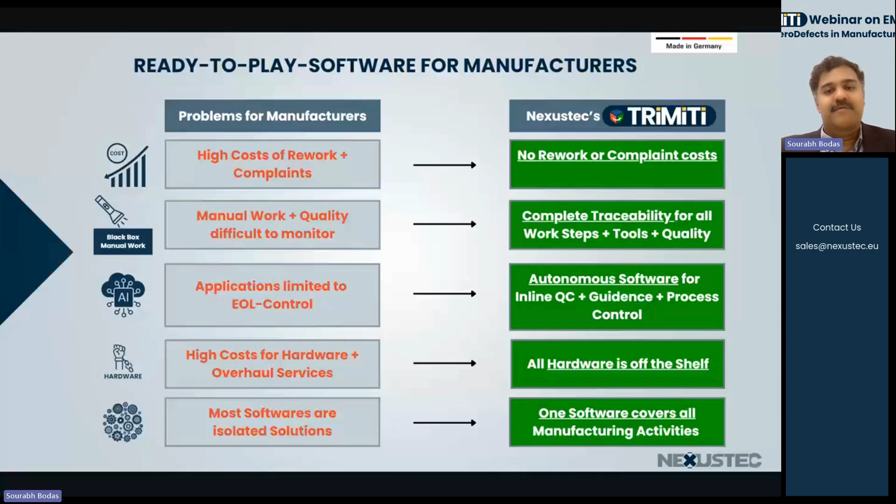But there is another critical quality failure which happens at the end of line, and that's packaging - meaning you've done the manufacturing well, but somehow a worker misplaces the package, either mixing parts up, or a part marked for rework or NOK ends up going out to a customer. Both of these things are not acceptable. So effectively, what we do is provide monitoring of the end of line area to ensure this doesn't happen.

Now, how do we do that? Our major statement is that we focus on human-centric automation. Humans are quite smart, and we have the dexterity that most robots can only imagine or not even imagine. So when we combine these two things with automated process control, we get the best of both worlds.

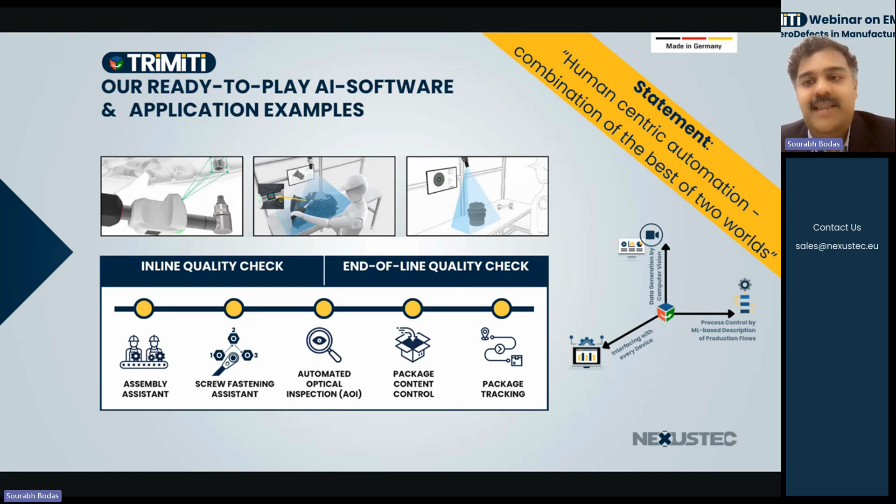Now, being a European company, one question we're always asked is about data storage or GDPR compliance. Our system is completely GDPR compliant, and when we go to India, it's also DPDPR compliant - meaning data generated by TRiMiTi is stored on an industrial computer at your location.

So we don't always back up the data to the cloud. There is an option to back up the data to your preferred cloud vendor, or to a cloud vendor provided by Nexustec, but it's not done by default. We need explicit consent from the customer to do that.

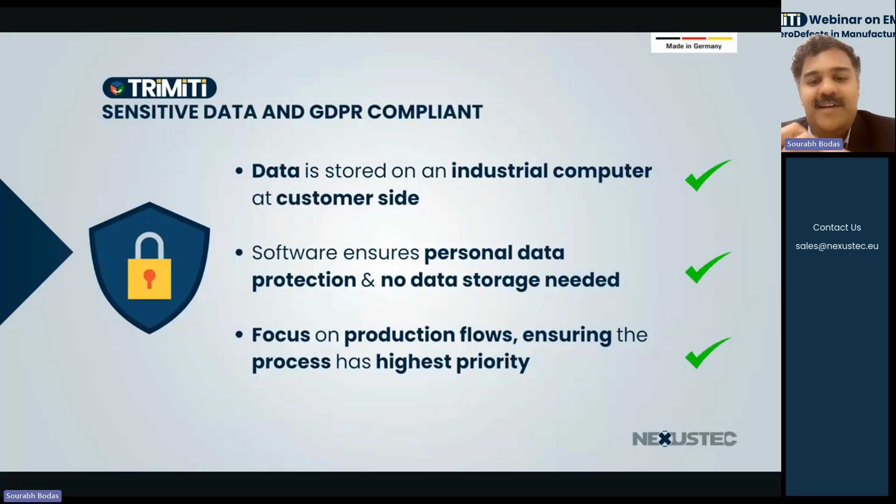We also have software which ensures personal data protection, meaning we do not record any videos or store any video data. We only store images of the products or parts being assembled, and that too is only done on request from the customer. The focus is primarily on the production flow, ensuring the process has the highest priority and not tracking people. By addressing these three topics together, we ensure we're not in the business of monitoring and tracking people, but ensuring you have zero defects in your manufacturing.

Now, once we go to the EMS and focus on EMS manufacturing areas - I know it's a bit of a misnomer, but yeah - when we go into the EMS industry, we have quite a few problems that need to be addressed. You need to have the correct parts or correct components.

These components need to be checked so there are no defects, and the wrong parts need to be sorted out. At the same time, you have to ensure the quality is uniform across the batch of production, and high according to your customer standards. You also have to ensure processes are followed correctly - if you have to assemble a board before it goes for wave soldering, you must ensure all components are placed in the correct sequence, position, and polarity before wave soldering happens, not after, because otherwise it's a case of rework. And all variants and customer specifications need to be met.

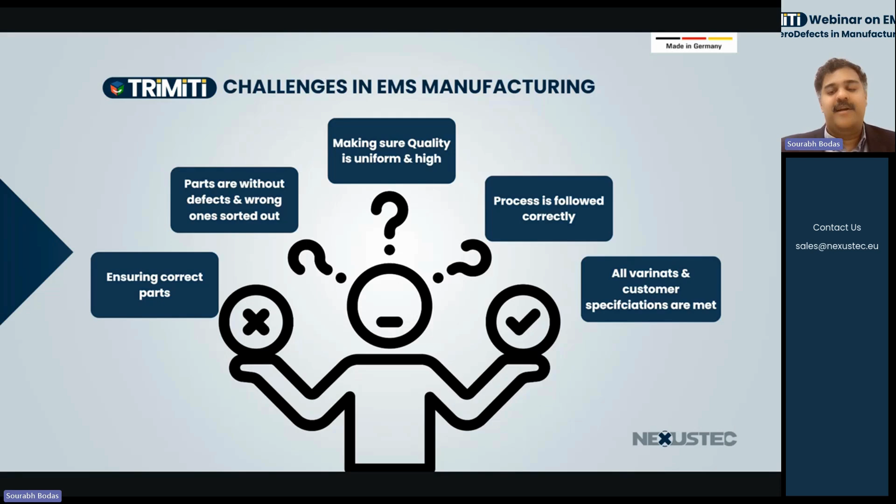So in EMS, you often have small batch sizes but a lot of variety, which means we need to be flexible in adapting to new variants. So what we do with our software - TRiMiTi is the name of our software, and the name originates from a Sanskrit word, TRiMiTi, which means three-dimensional.

We often say that it's because our software provides complete mobility on all 3 dimensions, but also because it combines 3 different orthogonal requirements into one product. So when we say process control in your production, we basically detect the correct assembly workflows, check the manual work, and TRiMiTi provides worker guidance at the same time as making sure the process steps are ensured.

We've already done quite a few integrations into our system. When I say we use off-the-shelf hardware, it's basically the TRiMiTi ecosystem right now, and it's growing continuously. We have several production tools already integrated in TRiMiTi, several camera distributors integrated in TRiMiTi, and the same goes for scanners and projectors.

So you have a complex step workflow where you need to scan the barcode of a part before you put it into an inspection cube. We can basically provide you one solution which can do all of those. But we also have system and control units integrated - for example, Siemens, Beckhoff, all kinds of SAP systems are integrated in TRiMiTi, which means we can also do production control not just on manual stations, but also on semi-automated and automated stations.

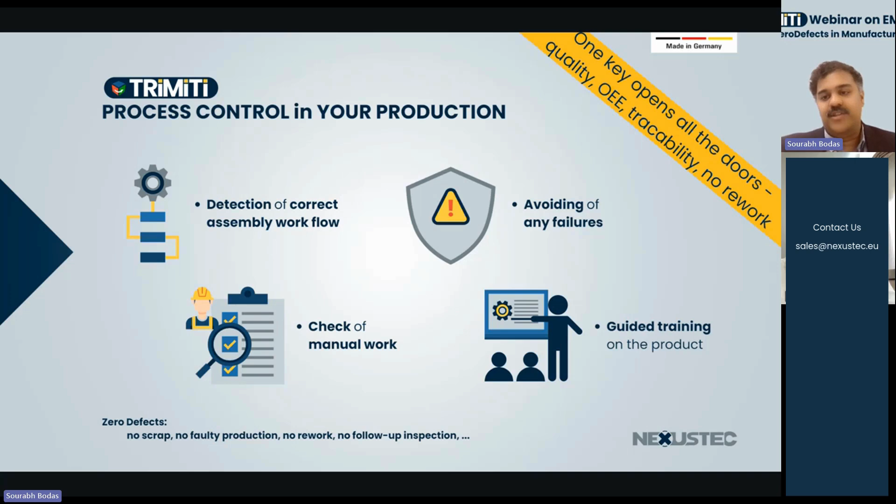Now, as I said, it's our software - your setup remains the same. And when I talk about TRiMiTi, we say we combine 3 orthogonal targets. As you can see, we have data generation from every action. So every action that the worker is taking, we are taking timestamp data, which means if your process has, let's say, 20 steps, then we are taking 20 timestamps, which results in having a rich data set for all of your actions.

Now, based on this data, you can analyze where exactly your workers are spending most amount of time and where exactly can you improve in your process.

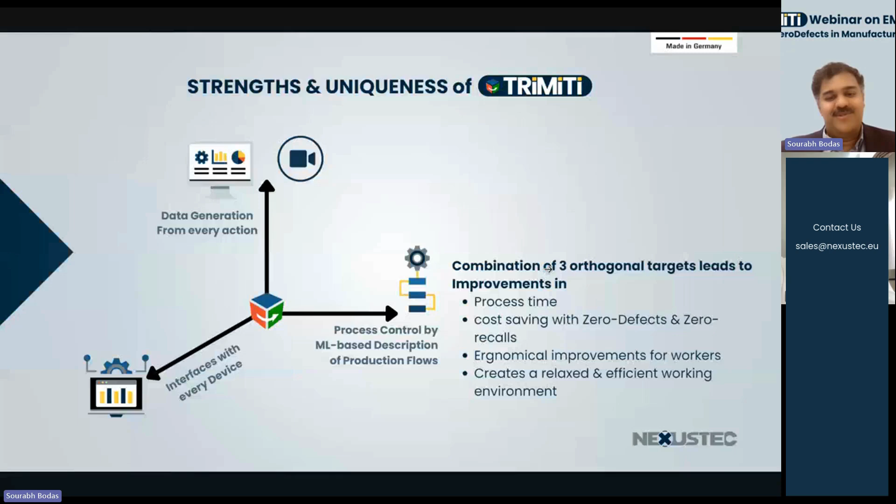Now, the second thing that we do is we interface with every device out there. As shown on the previous slides, we have a rich ecosystem already and it's continuously growing. So whenever a manufacturer gets in touch with us saying they have a customer who wants to use our hardware but your software, or vice versa - a customer says we have this particular hardware but it's not integrated in your software - then we do it right away for that customer. And once it's integrated, it stays in our ecosystem.

Now, the process control, which is based on the ML-based description of production flows - that's one of the biggest achievements that we've had - is to have a machine understandable language which is also human understandable at the same time. So we can take the production processes as described in your normal production documents, and then we can translate that in such a way that the computer can also understand it.

Now, the benefit of having all these 3 more or less orthogonal targets is that you can improve your process time, improve your cost saving, have zero defects ensuring zero recalls, and you can also have ergonomical improvements for your workers. So you will see in examples later on that oftentimes difficult to reach parts or difficult to reach components can be seen on screen in real time.

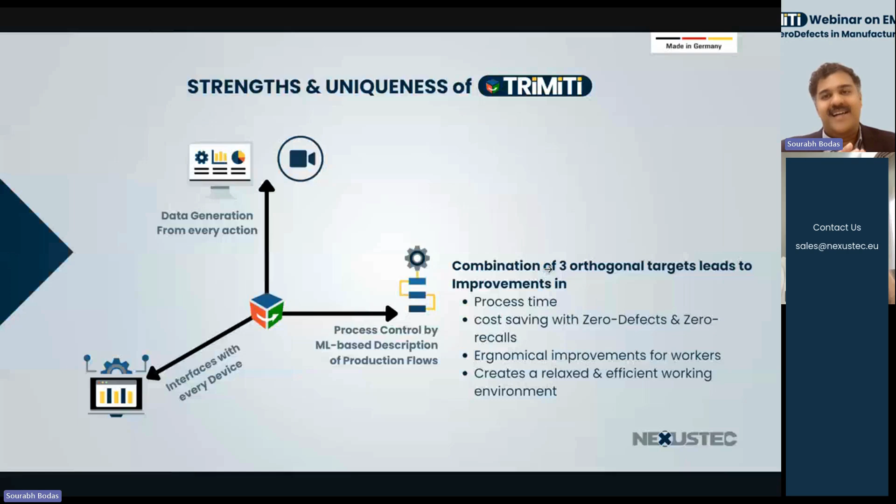So the worker can do a better job or do it in a more relaxed and efficient environment, because the worker knows that even if they make a mistake, our system is there to prompt the worker to make the changes right away - which means whatever leaves the station, it's not only the worker's responsibility to ensure that all the steps are followed as expected. Now, in your manufacturing environment, let's take a glance at how we can handle all of this.

In a worst case scenario, if you're facing a recall of a certain batch, you don't have to recall the entire batch. You can effectively analyze the data and see where exactly the processes are similar. So as an example, if the seal was applied with insufficient glue, you don't need to recall the entire batch. You just need to check which parts in that batch did not have sufficient glue applied from your dispenser, and then only recall those particular parts, which leads to further cost savings for you. At the end of the production line, all of this can be sent over to the ERP systems.

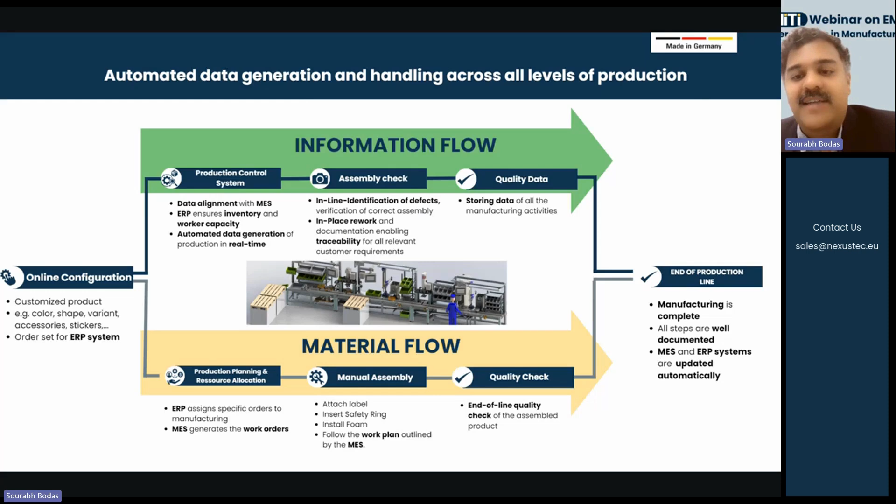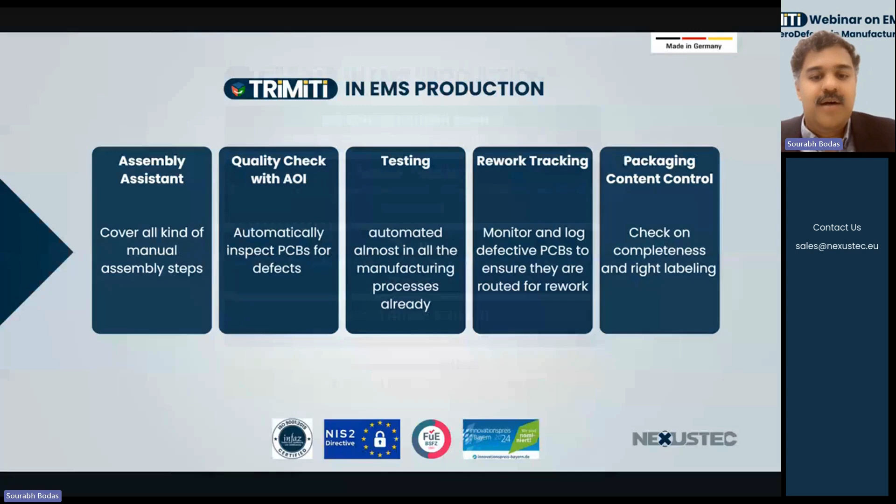So let's look at the first step: the assembly assistant. We have several features here we can highlight. Unfortunately, I don't have a video for this particular part because all the products we've done so far, where you assemble components on a PCB, were done under NDA for a specific customer, so we're not at liberty to show those videos. But we have documented some defects on our custom boards, and we can show you what we do.

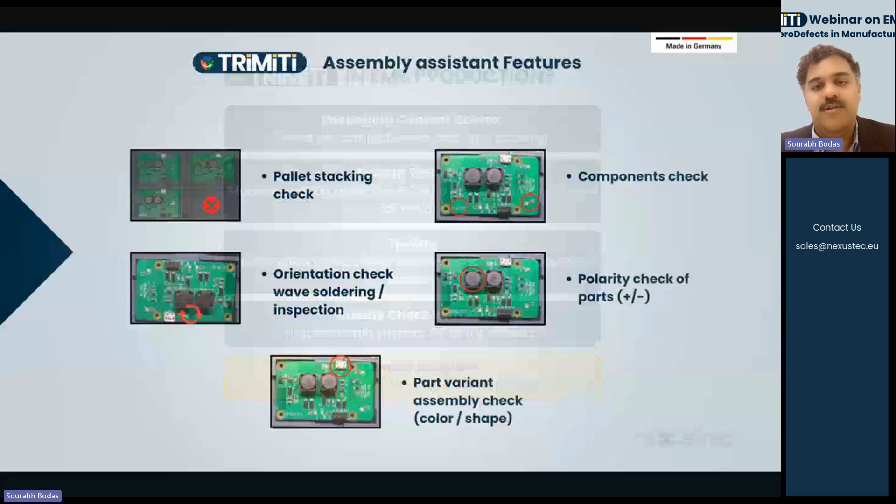We can check whether all the pallet stacking is correctly done, so all the parts are placed on the pallet in the right orientation. We can also check orientation for wave soldering or inspection. We can do variant assembly checks, checking color, shape, positioning, all those things. We can also do polarity checks, and check individual components for quality. So going one step further, let me give an example of how we can do the pallet loading check.

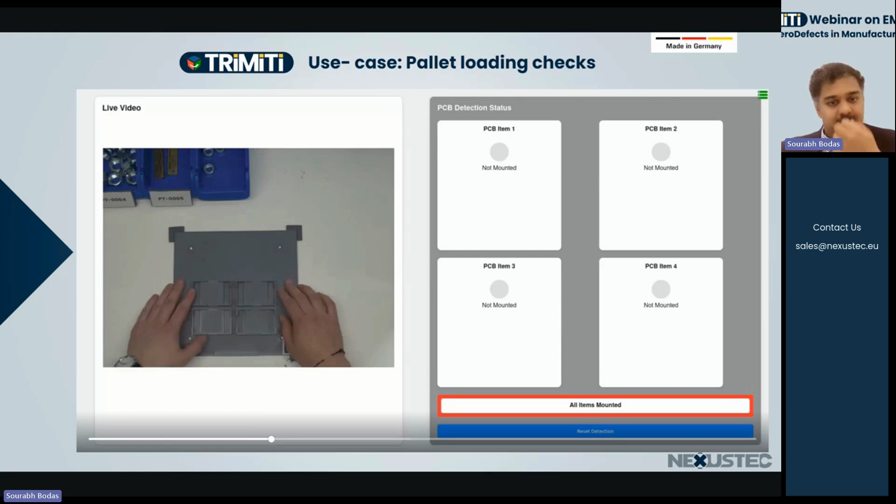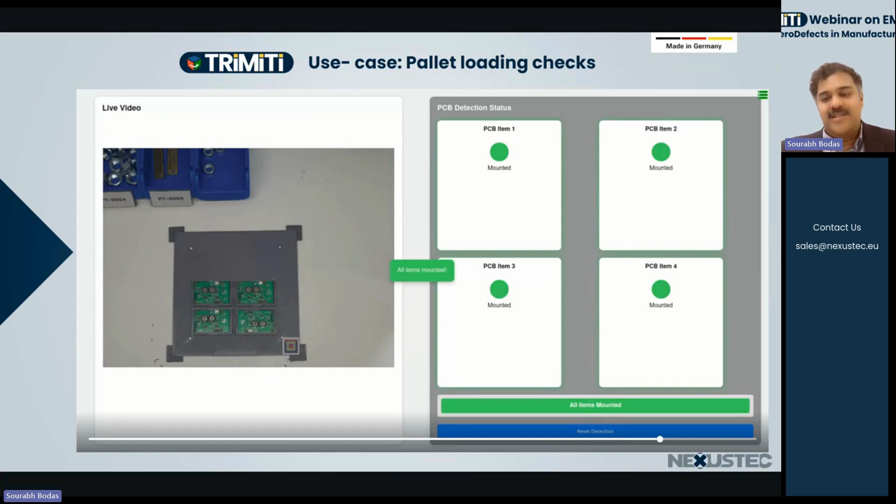As you can see here, it's a simple user interface. We have the pallet over there, and immediately it recognizes it needs to have 4 parts in there. As the worker is mounting those parts, we check the orientation, but we also do a quick scan to ensure all the necessary components are placed on that particular PCB. Once all the items are mounted, the system will tell you to go to the next inspection part.

So once we've done the assembly part and ensured all the components are there, we can even do a quality check before the wave soldering takes place, or before the SMD machine line is fed, so that we can ensure all the parts going on are in the right position, in the right orientation, and also that nothing is missing or defective.

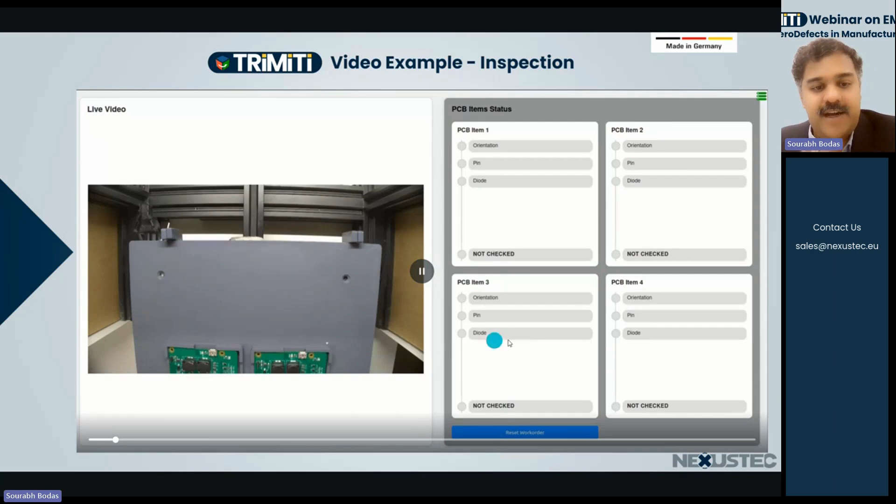As you can see here, on the 2 parts on the left side, our system already says there is a defect with the pins up there. And on PCB item 3, there was a defect with the diode - it was scratched, not the same as the others. For the first one, you can also see the pins are slightly bent. This is the quick optical inspection which our system provides.

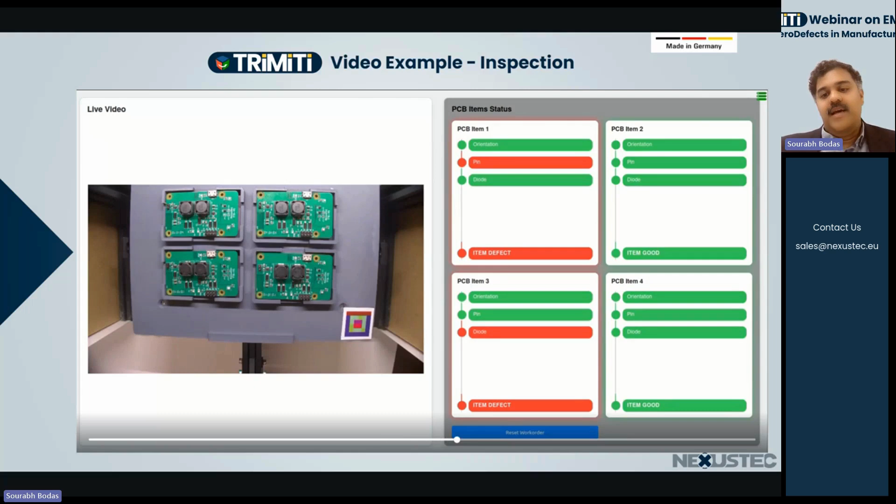Right now this is done manually, but it can be put in line with your SMD, wave soldering, or any of your machines doing automated manufacturing, which means we can do this process either in a manual workstation or in a completely automated environment. So the next part is interesting, because right now, let's say you've already done the quality check, gone through the soldering parts, and finished assembling the whole board.

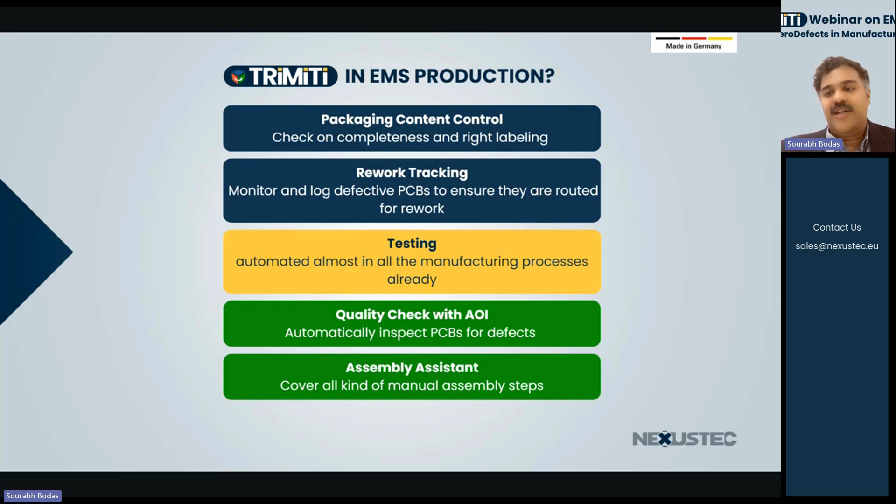And now you need to do the testing. So you can do electrical continuity testing, functionality testing, or different things. In this testing, right now, there is some kind of PLC-based control or PLC-based system, which effectively you connect to the board, you run the test program, and that's that. But to reprogram this system, you need to have either a good understanding of a deeper programming language like C, or you need to have somebody at hand who can reprogram this quickly so you can do these tests.

Or the alternative in a lot of small batch manufacturing is that this testing is then done manually by a person with a scope and two leads on a multimeter, for example, and then they will do the entire production batch like that. Now, the biggest problem is when we talk about a software-based control, we can also extend that control for the testing level.

And we have already done some projects in this particular domain, and we are also working on functionality testing. For example, we have the testing for the assembled LED panels for a customer. So we check that all the LEDs in that panel are illuminating to the right brightness. And effectively, we can combine the electrical testing and optical testing together in one environment.

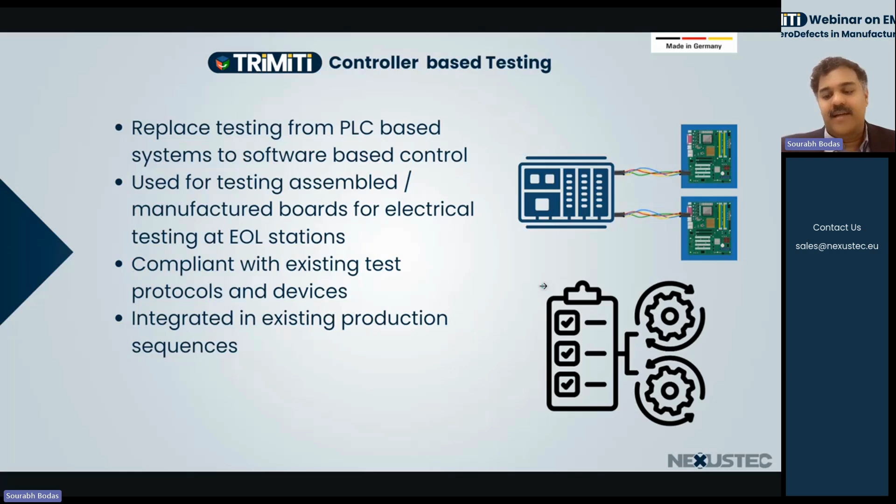Now, the benefit of this kind of software-based control is that the customized test programs can be written in TRiMiTi programming language, or you can also reprogram them in your user interface. So that can be done in minutes. And you can have fully customizable test routines based on how many variants or varieties of boards you have.

Now, what we did was integration was put on emphasis to quality test. So optical inspection and electrical inspection can be combined into a single station. And that basically gives you just one end of line station. You connect all your boards in the test jig, and we will do the inspection in parallel. So effectively, the entire system of testing can be handled by TRiMiTi.

Now, going to the next part, which is the rework areas. And when we talk about rework areas, we need to focus on what comes out of quality checks and what comes out of testing. In the previous videos, I already showed you a pallet. We have 4 PCBs on there, and there we had 1 or 2 PCBs which were defective. So how do we do this?

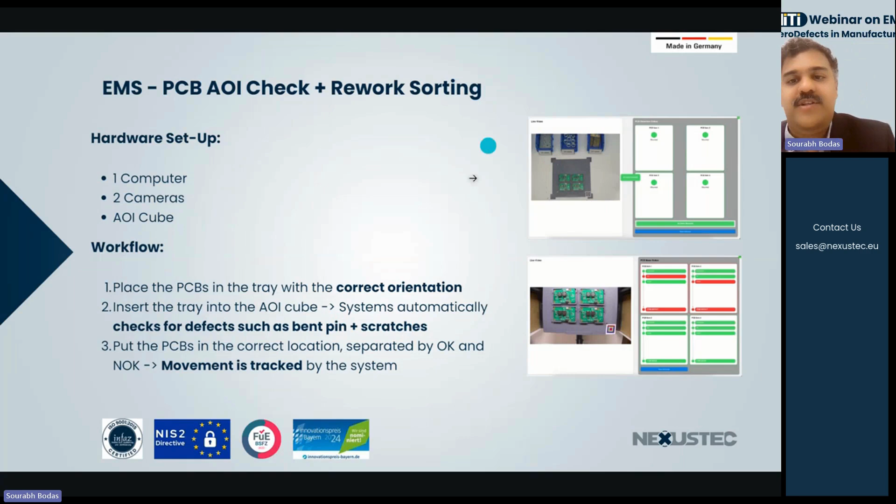So we have a simple hardware setup. We have a computer, 2 cameras, a small AOI cube, which you can see here on this side. And this is the loading area. So you place the PCBs in the correct orientation in the first step. In the second step, do the AOI testing. And in the third step, as you can see here, we will do the rework sorting.

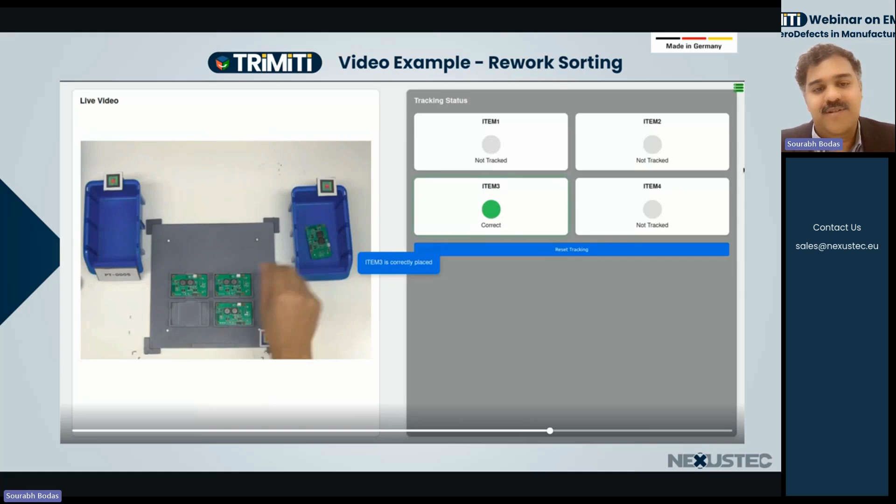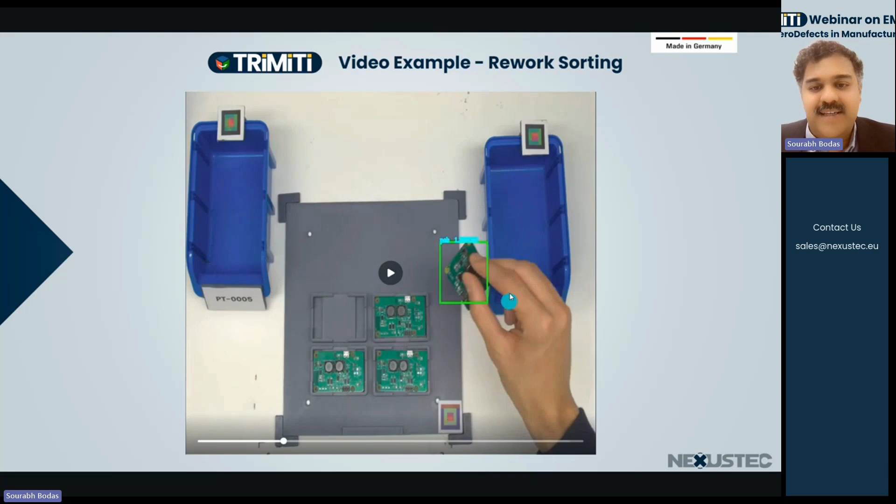So when you look at a particular pallet, take the part. Our system knows which part was taken, and our system knows whether it was placed correctly in the OK or NOK section. So just to elaborate a little bit more, how we do that is here you can see we have tracking algorithms. And as you can see, our system is tracking the board and not the person's hand.

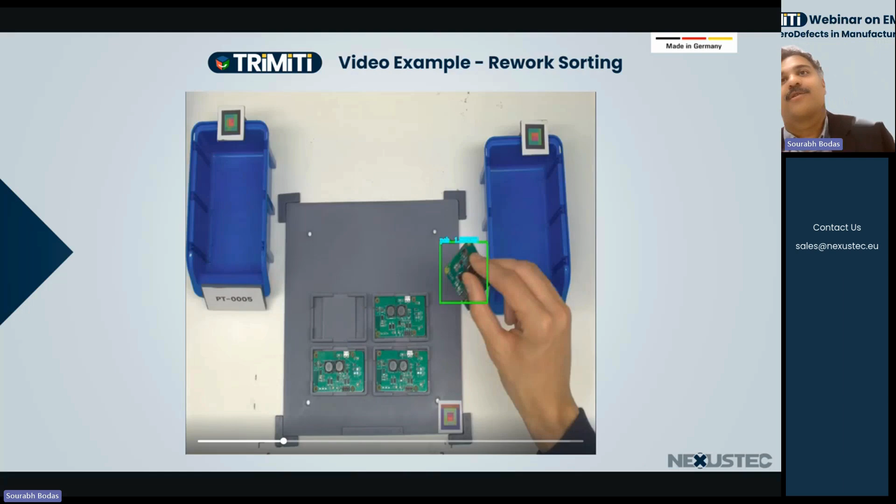And we have here these funny or nice looking color codes. So what we have done in Nexustec is we have developed our own passive optical marker. I think you can see it here in my hand. So it can be used for tracking tools, but it can also be used for different objects in a production environment. So we can know their position from the camera's point of view. We also know their orientations.

So effectively, if this board was placed 180 degrees the other way around, our system is smart enough to basically change the tray numbers automatically. So we don't have to rely on the worker not making any mistakes, but effectively we will cover any mistakes that the worker is doing.

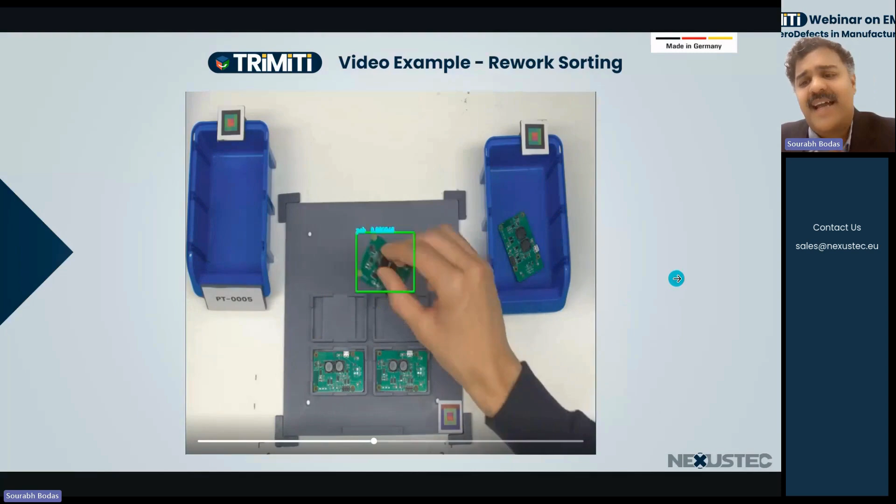And as you can see here, my colleague actually sorted the 2 NOK boards in the NOK part, 2 OK boards in the OK part. And based on that, we can analyze and tell you whether your OK/NOK sorting was done correctly or if there was any mistake in there.

Now, coming to the last bit in the EMS. Now, let's say you have done your manufacturing and now you need to put everything in a box so it can be shipped to your customer.

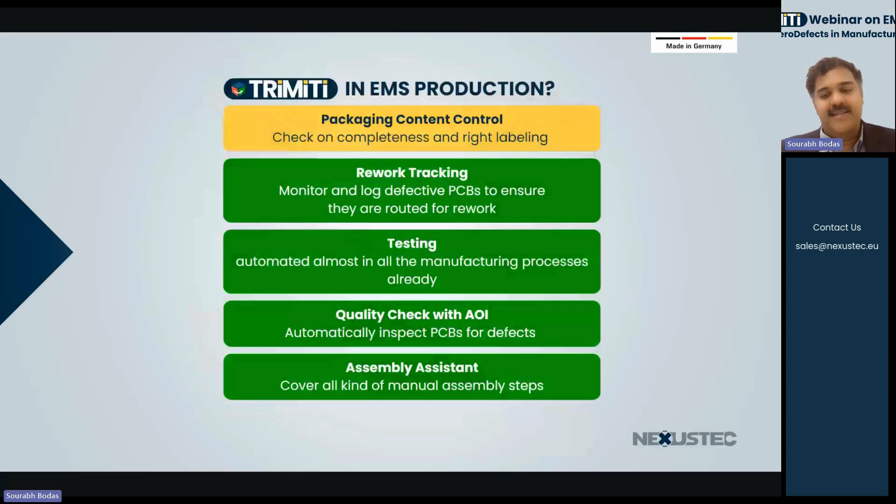So this customer could be your end customer, so it has to go in a nice cardboard packaging, or it could be you're supplying to the next in line, which means it has to go in some kind of trays put in a pallet or something. So we will just show the first example where you're packaging whatever you manufactured in a box.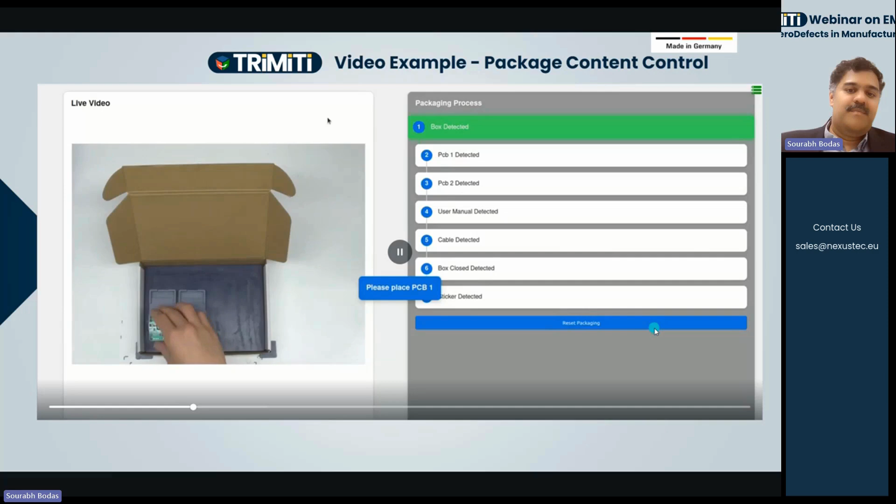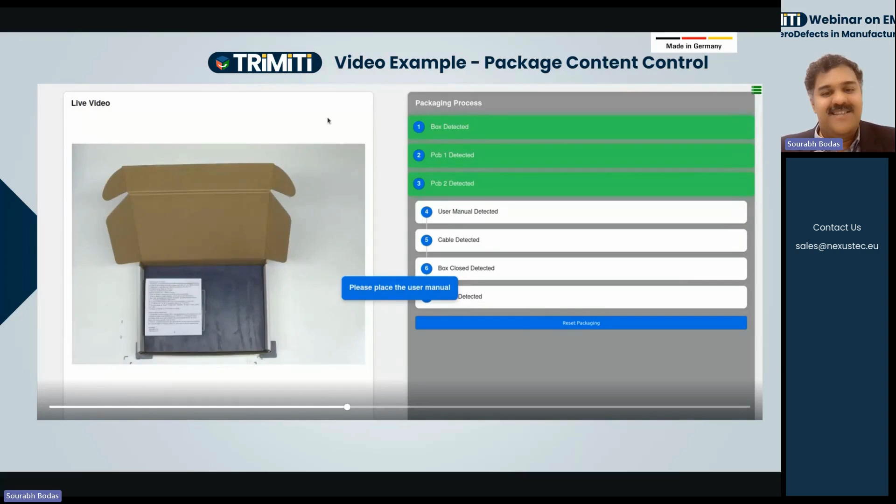As you can see here, my colleague likes to play around with the system. He's basically trying to place these PCBs in different locations to ensure the system is not going to make a mistake by detecting a PCB in the wrong location incorrectly. So unless and until all the parts are placed in the right location, our system will not say that it's done.

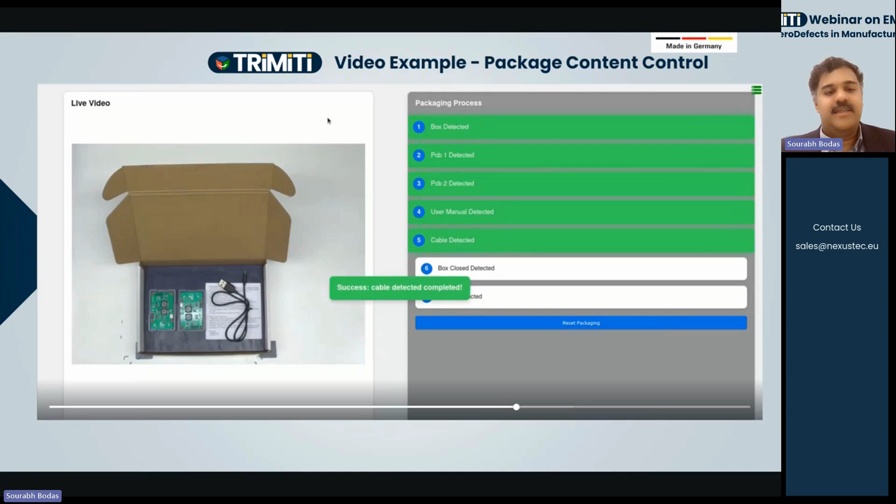And you can already have all of your packaging processes ensured in this way, not necessarily just the EMS processes. It can be for mechanical parts. It can be for anything else.

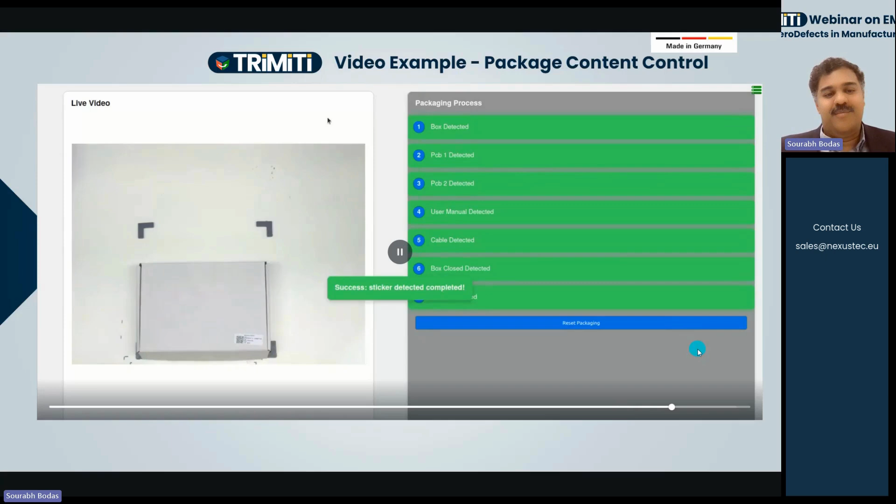As you can see here, we are not just checking inside the box, we ensure that the box is closed properly. And lastly, you're also placing the tag in the correct location for the box. Once all of these are done, we will say the packaging process was complete, and now this box can be sent over to the customer or whoever is further down the line.

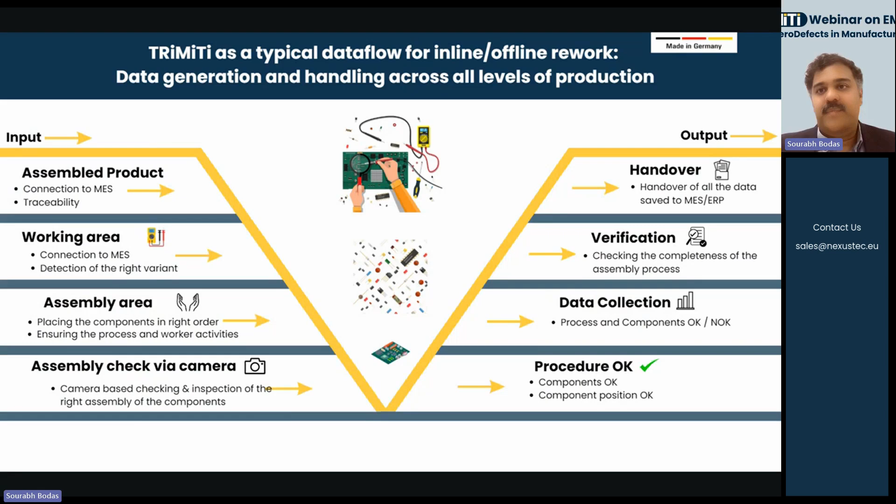Now, after having presented all of this, I'm pretty sure the next obvious question you're all asking is, oh, it's going to cost me a lot. But that's not the case, because effectively we have developed a software solution that can be scaled up. That means on our side we have also done it in such a way that the applications can be programmed in a fairly quick manner.

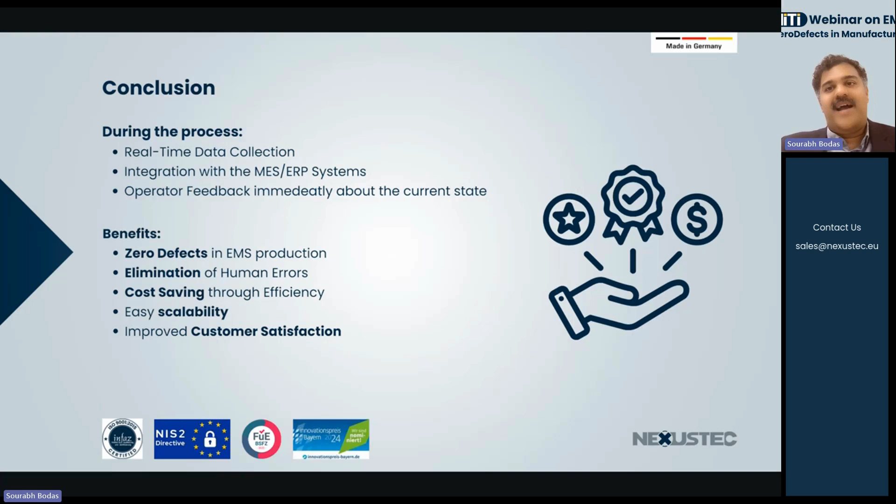We could do an application for you in less than 2 to 3 days once we have all the details, which means the price from our side we can offer at a very good starting price point, which is about 2,25,000 rupees or 2,500 euros. And from that point onward, depending on how complex your system gets, the price could go up.